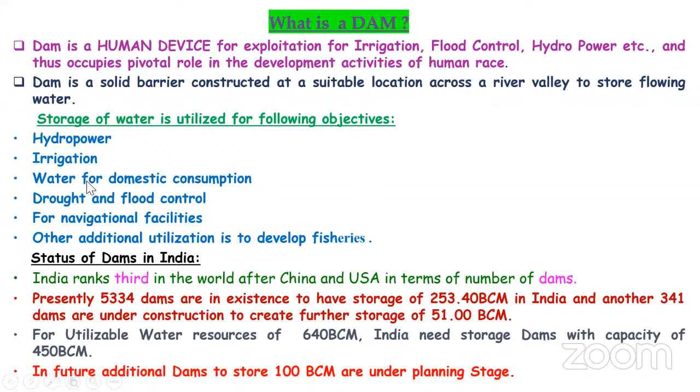A dam is a human device for exploitation of water. It's a multi-purpose structure, useful for flood control, irrigation, hydropower, industries, environment, drinking water supply, and many other activities. Even for environment, whatever greenery is there, the dam is important. A dam is nothing but a barrier across the river, but the barrier should have a surplussing arrangement, otherwise the dam will collapse. So these are the different purposes of the dam.

When we come to the status of dams, India is the 3rd largest country having many dams, compared to China and USA. China is number 1, US is number 2, and India is 3rd in terms of number of dams and storage capacity. Presently we have about 5,334 dams in existence with a storage capacity of 253 billion cubic meters in India. Other dams under construction will create about 51 billion cubic meters more.

But there is a positive scope to have more dams, with a storage capacity of 450 billion cubic meters. That's why some dams are under pipeline. So what I would like to tell you is that dams are so important - they are the backbone of the country and the backbone of agriculture and irrigation.

Dams will not only give irrigation in drought years - we have a drought once every 4 years, and drought can be mitigated by having more storage capacity, the carryover storage. So dams are very important. World across, people say that dams with more storage are required for the future also. Storage is very, very important.

For utilization of this, our utilizable capacity is 640, so we need a storage of 450. You may ask what is the difference between 640 and 450? When 450 billion cubic meters of dam storage is there, we will be drawing and it will get refilled again - just like any minor irrigation tank, we'll have 2-3 fillings. For dams, if not 2-3 fillings, at least 1.5 times filling will be there, so utilization will be 640 billion cubic meters.

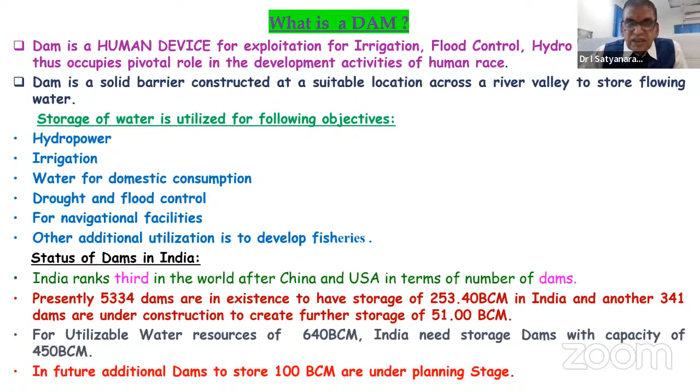In future, additional dams to store about 100 more are on the planning stage. In a graphical representation, I have shown you the number of dams and also the water. In pre-independence, our storage was only 15.6 billion cubic meters.

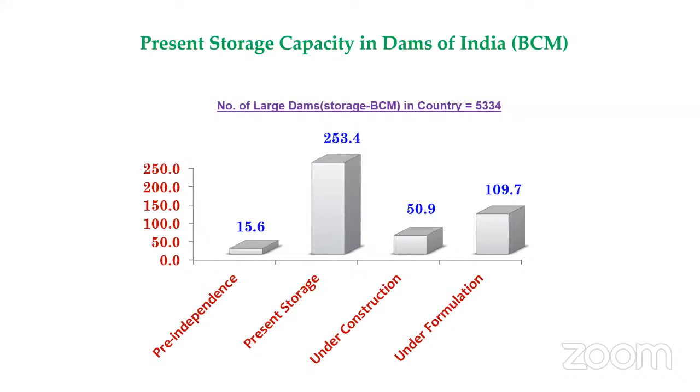We must be very happy that Jawaharlal Nehru started many dams like Bhakra Nangal, Hirakud, Nagarjuna Sagar, Srisailam, and like that. He said dams are the modern temples, and he gave highest regard to the engineers who built them. Because of that spirit we started, and also he was the Prime Minister who started the 5-year plan.

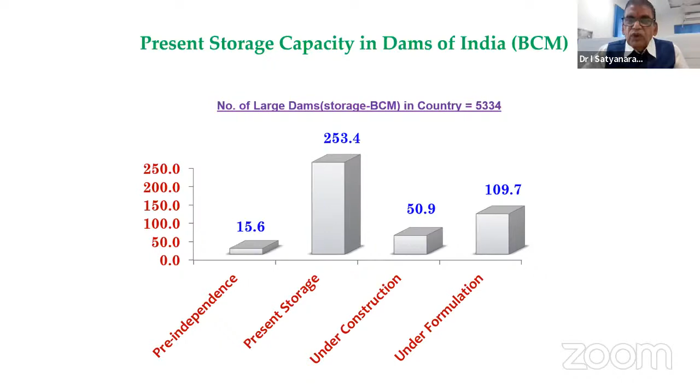So keeping some provision of budget for all these dams, ultimately now we are able to have a storage capacity of 253 billion cubic meters, with a number of 5,334 dams. Construction on dams is giving about 50.9, on formulation stage 109. Ultimately we'll have about 400 billion cubic meters.

Normally a dam is not a single line - you will be having an overflow dam and a non-overflow dam. The overflow dam is nothing but the spillway regulator. When dam safety comes, one needs to know about the components and what vulnerability will be there.

So it is a combination of dams - earth dams. You can see in Nagarjuna Sagar there's a long earth dam, and on either side we have a non-overflow dam, which at times is a masonry dam, with its coping in concrete, and a spillway. The spillway is the heart of any dam.

I told you it is a barrier. Barrier does not mean we will hold the entire water - we should always maintain the status of the earlier river, so some flood must be passed through it. That's why the spillway regulator is there. It must be there. These components must be properly designed and properly executed. Then only will the dam be safe.

Earlier they used to have masonry dams, now it's concrete dams. Concrete and masonry dams are called rigid dams, whereas an earth dam is a flexible dam. You may ask, when concrete dams are safe, why aren't we building concrete dams everywhere? Because engineering is economy - economy is achieved by using locally available material, and soil is locally economically available.

We try to utilize the locally available soil for the earth dam, but where the spillway regulator is, it needs to be a concrete dam. So we use it there, and sometimes the end connections will also be these concrete dams. But in some cases, like hydropower dams, only rigid dams will be there - for example, Srisailam, which is completely rigid, with a spillway regulator, and on either side a non-overflow dam.

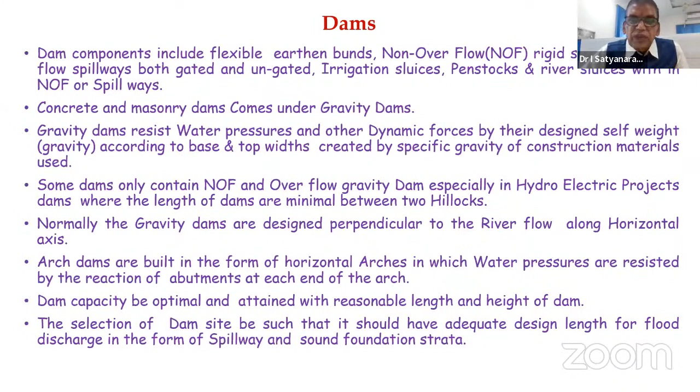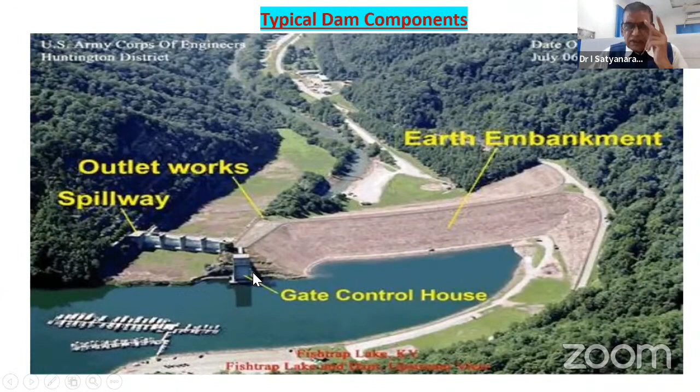This is a beautiful picture that I was able to get. Here an earth dam is shown, and even a spillway regulator is there. The gated control structure is for drinking water supply or irrigation supply. This is the reservoir that you can see.

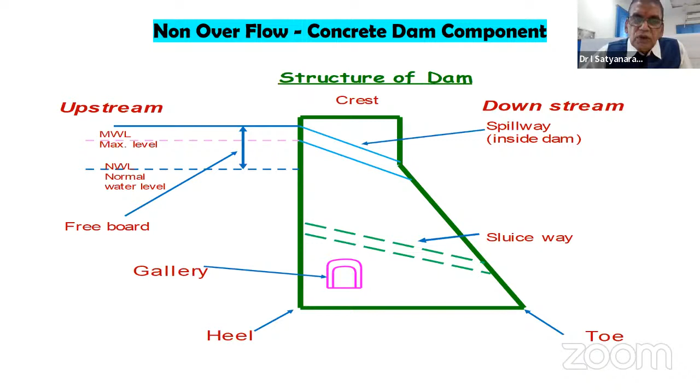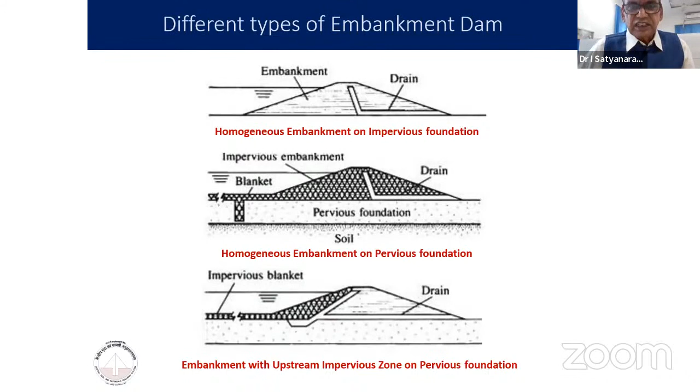So this is about earth dams. There are two types of earth dams: homogeneous earth dams with a filter, central core and so on, and zonal section dams. Homogeneous means only one type of soil is used, other than the filter media. The zonal section has a central core embankment, with different cores and sand filters - this is called a zonal earth dam.

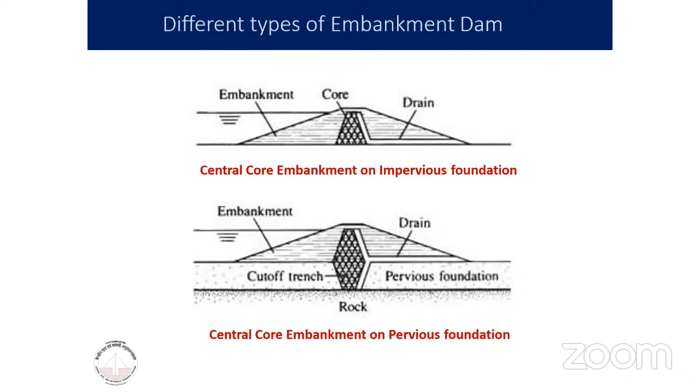Why am I telling you this? Every component of a dam needs to be kept safe. So there is a classification now. In the present code they call them specified dams, but earlier they used to call it a large dam. The definition of a large dam means the dam height is more than 15 meters. But even if the height is less than 15 meters, if the earthwork quantity involved is 0.75 million cubic meters, it was also categorized as a large dam.

Another important thing: even if the dam height is less than 15 meters, irrespective of height, if the storage capacity is 1 million cubic meters, it is also brought under earth dam as a large dam. And even if the maximum flood discharge through the spillway is 2000 cumecs, nearly about 70,000 cusecs, it is also called a large dam. These are the definitions.

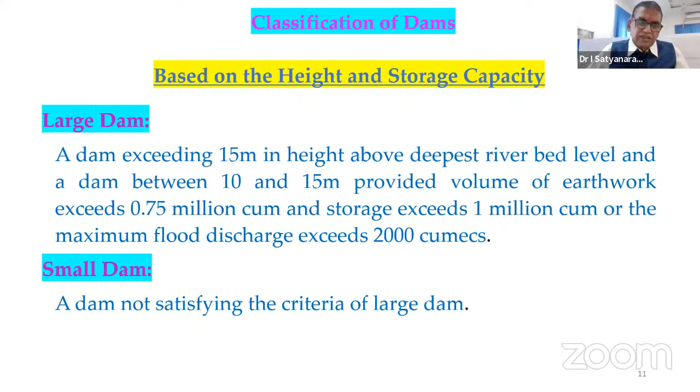But when I discuss the act, that is a separate categorization - the word 'large dam' is now missing, they have removed it. Now it is a specified dam. Anything inferior to, less than, these parameters is called a small dam. This is for design purposes.

We have three categories: small dam, intermediate dam, and large dam. This calculation depends on the design flood. Normally any dam will be designed for a 100-year flood, 1,000-year flood, or 10,000-year flood. All small irrigation dams will be designed for about a 25-year flood. Any gravity dam or earth dam other than medium irrigation projects will go for 100 years. For intermediate dams, where storage capacity and hydraulic head matter, that is 12 to 30 meters, the standard flood will apply.

All large dams need to be designed for probable maximum flood (PMF). PMF means the scenario when all the inflows and rainfall come together - it's a theoretical concept, like a flood that occurs once in 10,000 years. PMF is the flood expected from the most severe combination of critical meteorological and hydrological conditions reasonably possible in a particular drainage area.

Designing a dam for probable maximum flood is very costly. Some designers argue it won't come once in 10,000 years, so why should they invest in a longer spillway?

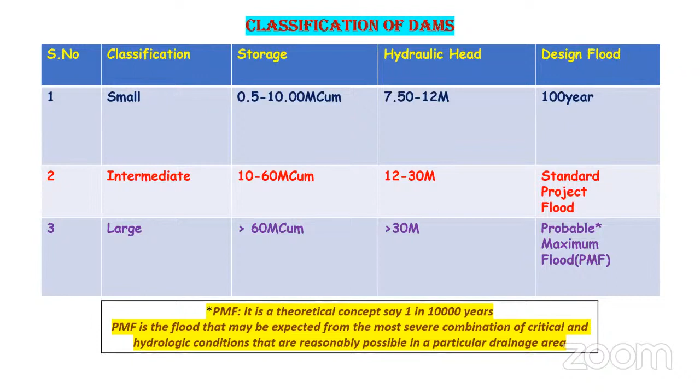But what was proved is in 2009 at Srisailam, which was designed for a standard flood. The probable maximum flood was estimated at about 26 lakh cusecs, but nearly 23 lakh cusecs actually came. So there are danger belts - any dam may experience that probable maximum flood.

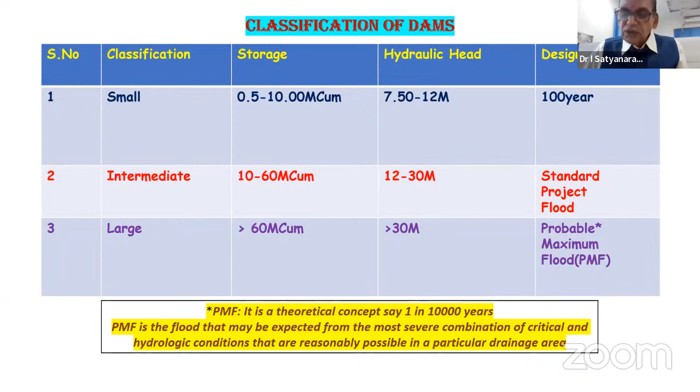That's why all existing dams must be checked for probable maximum flood and dam safety - whether the dam is safe with adequate vent-way and spillway length.

These are the number of dams across the world - nearly about 59,000 large dams are there. Earth dams are about 38,000, and rock-filled dams are also common. Rock-filled dams mean the hearting is only soil, and rock forms the outer cover.

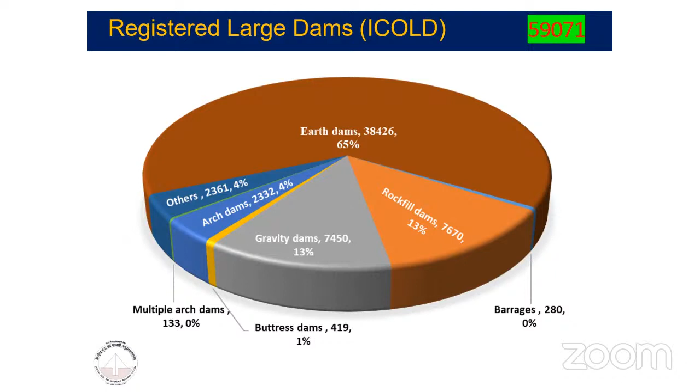Why rock-filled dams? When you excavate the foundation, a lot of muck is generated. Engineering is nothing but economy, achieved using locally available material. Instead of wasting that rock muck, you utilize it to cover the hearting - like at Polavaram, which is also a rock-filled dam. This is economical and the structure will withstand well - it's essentially waste management or recycling of available materials.

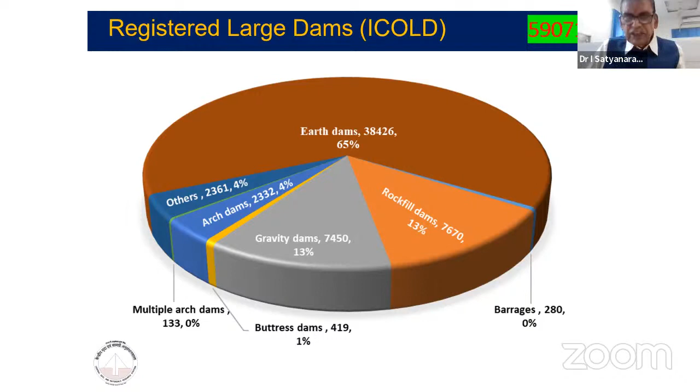Gravity dams number about 7,450, purely gravity dams. There are also combination dams, with gravity dam and earth dam together. This is for large dams, more than 15 meters.

Now for the Indian scenario: completed dams number 5,033 or 5,334. A PDF version of this PPT will be kept on YouTube, and I'll also arrange it through the Institute of Engineers so anybody can access it.

Coming to large dams - large dams means more than 1 million cubic meter storage, so irrigation dams also come under this category. Under construction, there are about 411 large dams, making the total number of large dams 5,745.

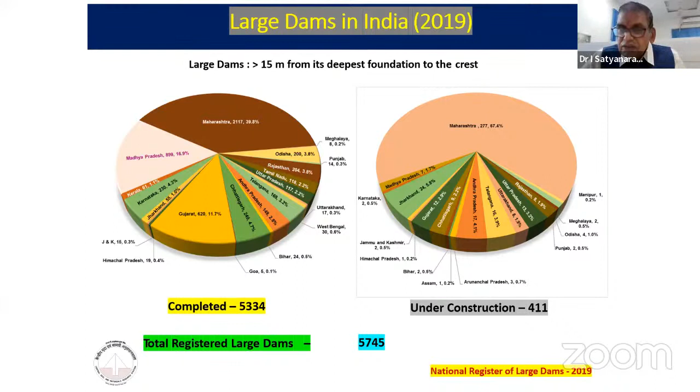On the other slide I mentioned the number of dams - medium and major dams total 5,334. This is according to a register of large dams from 2019. Now, instead of 'large dam,' they are calling it a 'specified dam.'

Year-wise, the large dams with their deepest foundations to the crest are tracked, since dams are progressing every year - some are completing, and there's statistics taken on this.

So what is dam safety? It's a techno-management discipline - asset management and public safety assurance on the part of the government. Techno-management means a dam has to be kept safe, otherwise it's giving a lot of benefits that could be lost.

If a dam breaks, the entire thing will collapse - storage will not be there, drinking water will be a problem, irrigation will be a problem. Even the cost of the dam, the asset management and capital cost invested, is lost, and it has to be rebuilt with additional cost.

Safety is important - when a dam breaks and collapses, on the downstream side a lot of villages and large areas get submerged. There will be loss of life, loss of property, and loss of crops. So we have to keep all these things in view - dam safety ensures dams will not break, losses will not occur, and the structure remains safe and functional.

Just like human beings want to live for more years, dams also live to the extent of their design. Generally, failures will occur - hydraulic failure will be there, including overtopping, erosion upstream and downstream side, and toe erosion.

Seepage failure - for earth dams, when the failure starts with seepage, ultimately it becomes piping, and the dam will collapse. Structural failure will be there on the downstream side. The toe will get erosion, both upstream and downstream side. Sliding will also happen - dams also get slides.

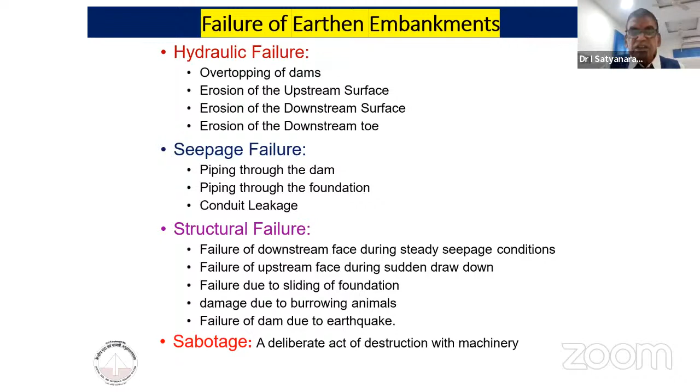Other defects that lead to dam safety issues are overtopping, wave erosion, toe erosion, gully formation, and internal seepage. Instability of foundation is also a concern - sometimes foundations create problems during construction, and we conduct investigations with boreholes since only samples are available.

But sometimes between boreholes, faults will be there, which creates problems that surface even after construction. Sometimes the dam will deform, and settlement is another important issue, especially for earth dams.

The major cause of dam failures is foundation failure, overtopping, and inadequate spillway. About 50% of dams collapse because of inadequate spillway - the spillway is designed for a certain flood, but the occurrence of flood is much more than that.

We are very grateful that our engineers built great dams. KL Rao and other engineers of those generations were very dedicated - they built Srisailam and Nagarjuna Sagar. That's why even though the design flood was exceeded in 2009, the dam was quite safe.

But not all dams will be like that. For example, the same discharge went to Nagarjuna Sagar, which has earth dams on either side. The earth dam could have been breached at that time, but we were able to manage it.

I proudly say that I was one of the management team during 2009, as a special officer deployed to Srisailam, Nagarjuna Sagar, and also Prakasam barrage. There was a lot of risk management involved there as well.

Uneven settlement and earthquakes are other important things. Fortunately, both AP and Telangana are not in a severe earthquake zone, but some earthquakes will come, and there's no guarantee a severe earthquake won't occur in future. That's why you have to design the dam against earthquakes also.

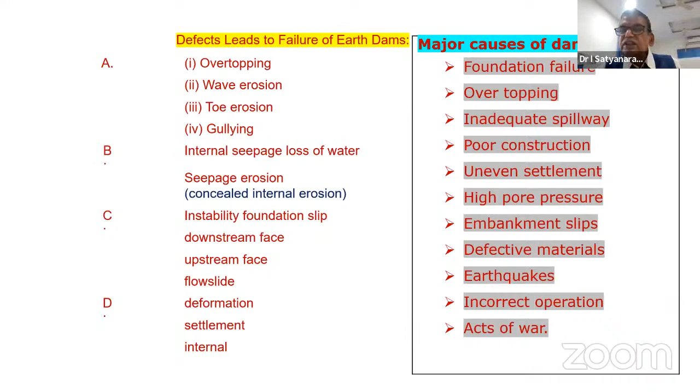Operation is also very important. Some people operating the gates think the reservoir will fill up again if they release water, wondering whether inflows will refill it. If you take the risk of non-operation, the dam will overtop and collapse. Most dam failures - about 50% - happen because spillway lengths are insufficient.

At the time of dam design, we design according to the historical hydrology available. Srisailam was also designed for about 15 lakh cusecs at maximum water level, but it received 23 lakh cusecs because subsequently severe events occurred. Now, for any future dam construction, we will take 2009 as a benchmark.

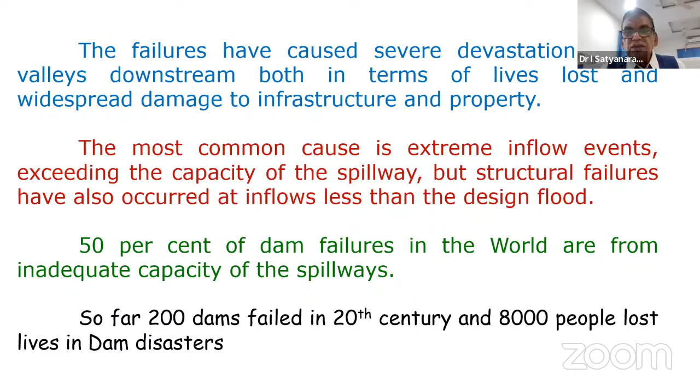200 dams across the world failed in the 20th century, and 8,000 people lost their lives. People think a newly built dam won't fail, but the situation is different - some dams failed even during execution. I'll tell you one or two examples.

About 44% of dams, according to a statistic of 36 dams, fail within 5 years. Normally we think a dam will fail after 40 or 50 years, but there's no guarantee a dam will be safe till then - sometimes dams fail sooner. In 50 to 100 years, normally we'd expect about 16.67% to fail. More than 100 years, only 2 dams failed. Of course, when a dam reaches that age, we'll go in for a new dam on the upstream side.

That is what happened in Dowleswaram Anicut and Krishna Anicut, and also Nizam Sagar. So we have taken precautions for the retrofitting and rehabilitation of the dams. So some dams failed in these cases.

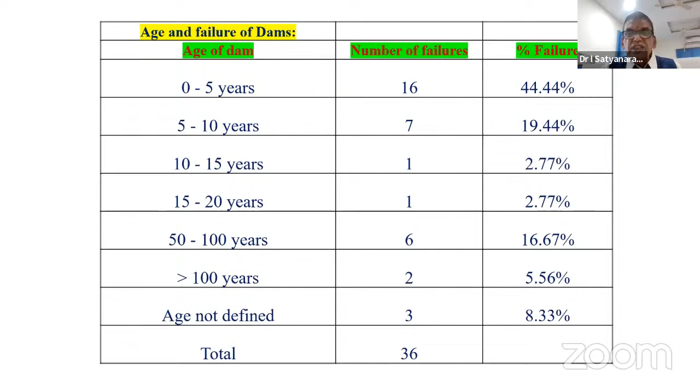Failure of dams, I think one cause is age, and this is about different technical problems. Mostly 40% of dams failed because of foundation problems. Next comes the inadequate spillway - spillway length is not sufficient, and number of vents are not there.

In spillway gates also, I think 10% we take as inoperative. That means during flood time, because of the hydraulic head, some of the gates cannot be operated. So when hydrology comes, we design for a number of dam gates, say 20, we will add 2 more, normally that safeguard we take. Even that, sometimes the capacity is not sufficient, then dams will overtop and fail.

So poor construction - I think because all senior engineers cannot be there, it will depend on some work inspectors or one or two lower level engineers. Some work is happening 24/7, so supervision also, of course some designs will take care of these flaws in supervision and quality control, but all these things will be there.

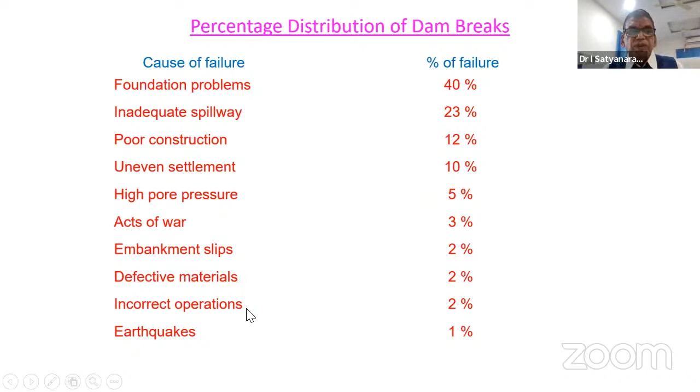Act of wars - I think other countries, enemy countries, they blasted the dams, that is about 3%. Defective material also we must be very careful about - cement, and sometimes steel also, some problem with local rolled steel and other things. Operation - incorrect operation, and earthquakes only 1%, but now all dams are checked for earthquakes.

So these are the failure causes - same thing, defective spillway, defective outlet. Please go through that, because in an endowment lecture we cannot go on like a seminar for about 1 to 1.5 hours, normally it's 30 to 40 minutes. So I am keeping this PDF on the website and also making it available to the Telangana State Center.

So concrete failures also - what are the concrete dam defects? Uplift pressure will sometimes cause dam failures. Over stress will be there. Tension also sometimes causes failure of concrete dams. So the center of gravity, middle third rule, you can go through that.

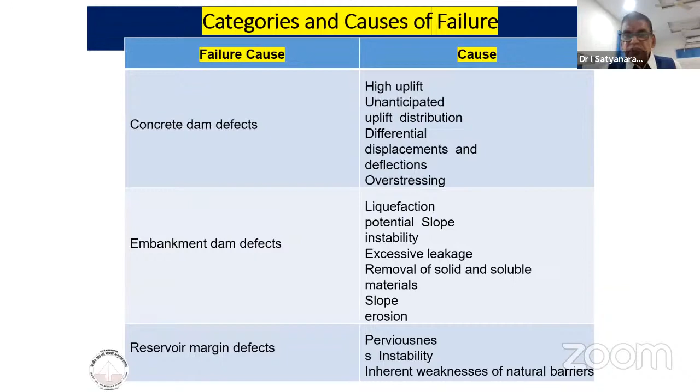Embankment defects already include liquefaction - if foundations are sandy, settlement will occur. Liquefaction is an important factor for designing earth dams. Reservoir margin defects - there is instability and weakness of natural barriers also. Flashy floods also are another cause for this.

So these are some of the list of dams. In India, about 36 dams failed. We got this statistics and information on different things. Even our Kadam Dam also failed - we had this in the combined state, now in Telangana state also, because that was due to flashy flood.

In a short time the water came and overtopping happened. So mostly it's breaching, piping - it's all about this. In Tamil Nadu, Kodaganar, Machu Dam - I think I will show you 5, 7, 8 cases of dam failures so you can study these.

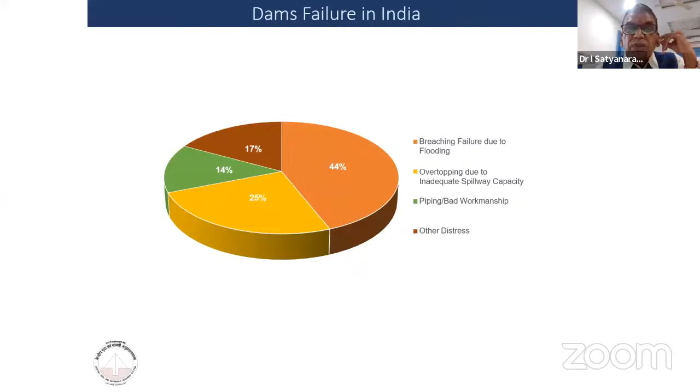So these dam breach failures are 44% of dams failed by breach failure. Overtopping is about 25%, and piping and bad workmanship is 14%, and other distress is 17%. So these are different years of dam failures in different years, we can say.

So now we come to this - 200 dams failed in the 20th century and 8,000 people lost lives. I have already read this statement. Some of the important dams that failed are Vaiont Dam in Italy, South Fork Johnstown Dam in USA, Teton Dam in USA, Tailings Dam in Italy, Malpasset Dam in France, and Kantle in Sri Lanka. These are some of the cases.

In India, Machu Dam in Gujarat failed in the 1970s. Kadam Dam, as I told you, because of flood the earth dam was breached and the spillway was not sufficient, so a new spillway was also added. Panshet Dam, near Pune, was also failed.

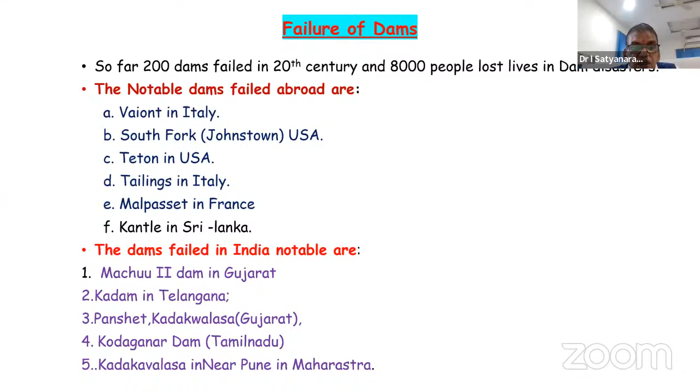Kodaganar Dam is in Tamil Nadu, and Panshet is in Gujarat, near Kadakwalasa. So Machu Dam is one case - this was built in '72 on the Machu River in Gujarat. In '79, a flood actually - the design flood for the spillway was 6,180, but 14,000 cubics was achieved.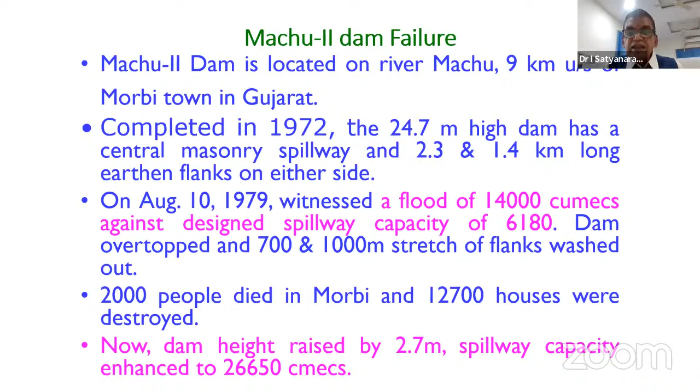Next is Kaddam. Actually, Kaddam is a part of this SRSP. This is Koyna Dam, which is a hydropower dam, in an earthquake zone. Initially, whatever history was available at the time of dam construction, they took into account, but subsequently the severity of earthquakes was higher. During construction, through the years, earthquakes occurred and some cracks developed. They rectified it at Koyna Dam, and ultimately now it is safe. But only recently a seminar, a national convention, has happened on it. So Koyna Dam, actually all hydropower dams, have tailraces that go through the river.

But the particular thing about Koyna Dam is that all its tailrace water goes into the Arabian Sea. Now Krishna is a deficit river. Had that tailrace water gone into the Krishna river, some water problems for Telangana, Karnataka, and AP could have been solved. Actually, there is a logic also: one chief minister at that time said that in June and July, please don't produce hydropower, please leave the water to the downstream side, and we will pay whatever cost of the power you are generating. But these are all interstate issues.

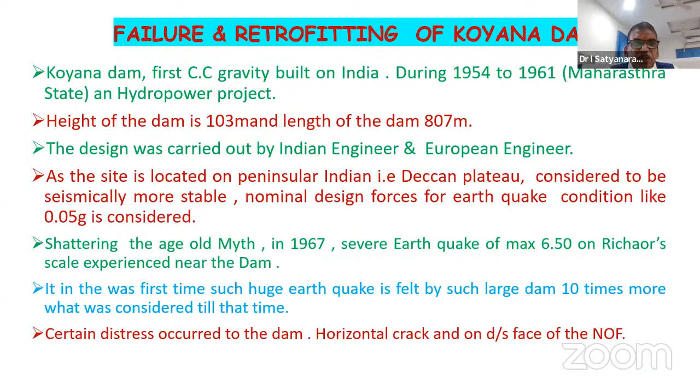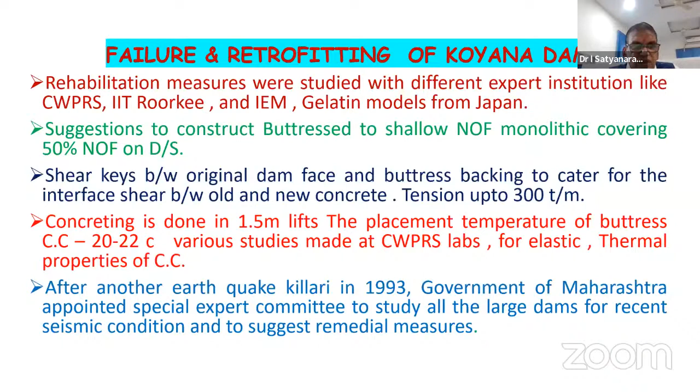So a lot of studies have been taken up, and now they have taken all remedial measures for Koyna Dam. This is, I think, one of the very good hydropower dams. But the only thing is that after generation of power, what is going to the sea is wasted. So this is another dam in this one.

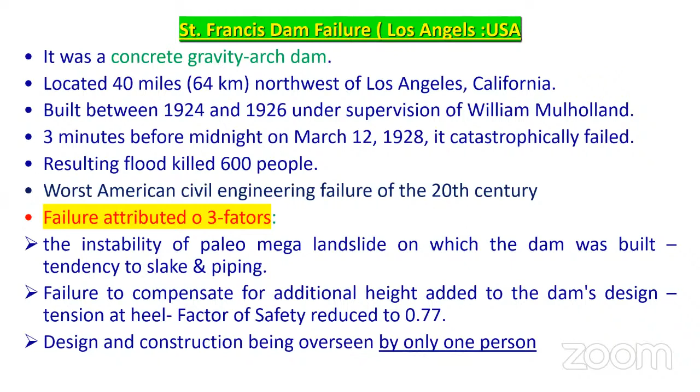Another thing is construction and actual supervision failure was also attributed to this. So this is the Malpasset Dam in southern France. This is an Arch Dam, actually, that is one of the things noted here.

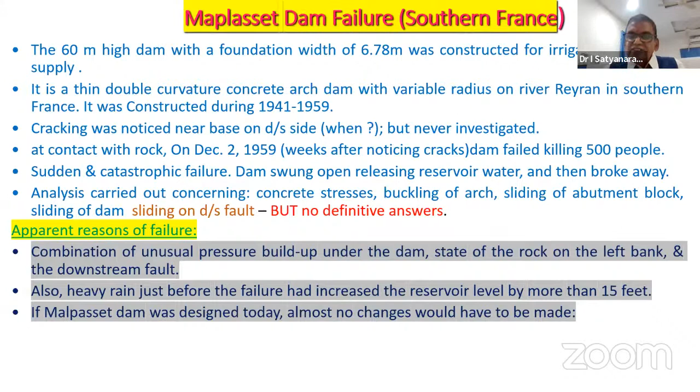So heavy flash floods. Actually, this is the Malpasset Dam today. At that time, the design criteria were different. I think now in Nagarjuna Sagar and Srisailam, the design criteria available from BIS codes or ISI codes were from the 60s and 70s. Now a lot of changes have come. So we have to check these dams against present criteria, and that means we have to do retrofitting or rehabilitation of the dams.

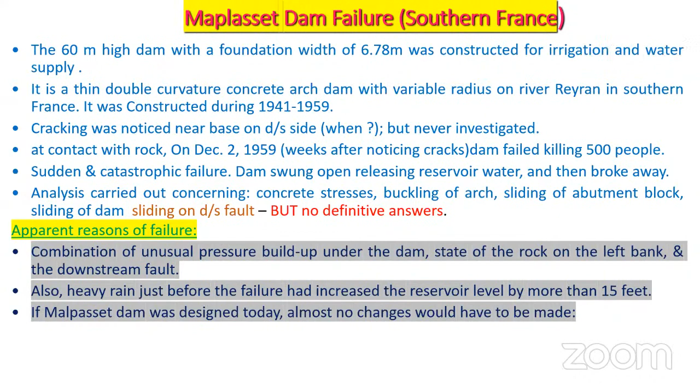So Kaddam Dam failure was actually because of a flashy flood. I think the catchment is very flashy, with a short catchment area but in a short length. So that is there. I think here also an additional spillway was constructed.

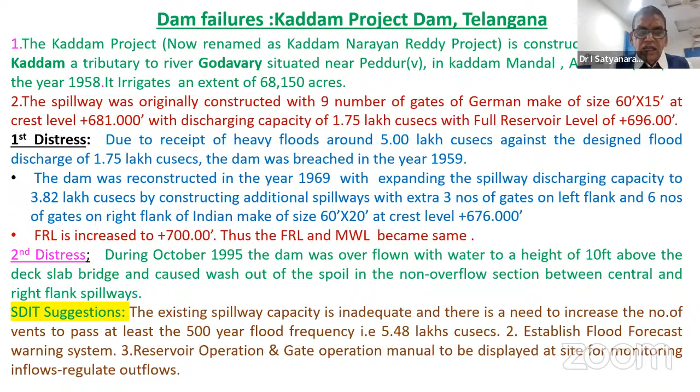I think GL Rao's team was also involved during this failure. It failed twice, because of overtopping, and additional spillway capacity was added and increased. Ultimately, the State Dam Safety Inspection Team, with experts, found the existing spillway inadequate. There is a need to increase the number of vents to pass at least a 500-year flood frequency, and to establish flood forecasting and a reservoir operation manual, which is very, very important, as they suggested.

So this is actually the Kaddam Dam. Originally, when the spillway was there, additional spillways were added to it.

So this is Gundlavagu, my irrigation tank. Dam failure means it need not be breached. Actually, they built a dam, but the storage is not there. The dam used to be empty, once it is stored in 2-3 days. So again, with grouting and other things also, we got it done.

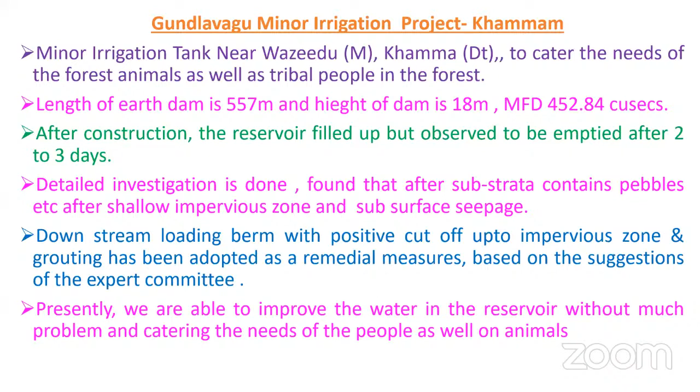Dam safety means actually water breaching, growing, it is going through underground also. In the downstream side also, a lot of habitations will be affected. Water table will be higher and structures will collapse.

So this is the one, even during the construction time, the Palem Vagu in Khammam district at that time, now it is Mulugu district. During construction time, twice it failed. Of course, it is a medium project, but the height of the dam is nearly about 35-45 meters, 40 meters highest. Normally in a dam it will not be there.

Here also the flashy flood is there. Actually, the spillway was designed, and because it's an interior remote location, there were some extremist problems. An ungated spillway was kept in plan, but they found some foundation failure, and the rock is not solid rock - it is layered rock. So it was breached twice. Ultimately, we provided another gated spillway.

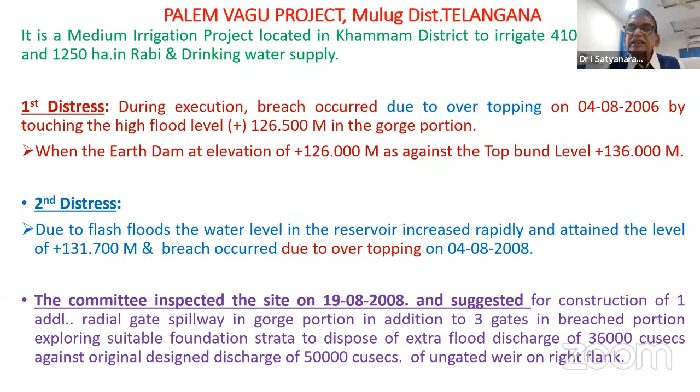So this is also one of the cases. Recently, as an NABARD consultant, I have visited - now the dam is quite all right. So this is actually an earth dam that was breached because of overtopping and all those things.

So now we are coming to the background of dam safety. What is the background? Why did the Dam Safety Act come into force? In 2002, a draft Dam Safety Act was prepared by the Government of India. It is actually a Government of India act, so they circulated it to all the states to pass the act through the state legislature.

In the Indian Constitution, some subjects are of concern to both state and central governments. So at least 2-3 states must pass that act as a central act, then the Government of India will pass that act, and ultimately it will come into force. So when I was the chief engineer, we got this act passed in 2009.

West Bengal also passed it, but subsequently, after 2-3 states had passed it, they introduced the bill in the 15th Lok Sabha on 30th August 2010. But at that time, the bill was referred to the Parliamentary Standing Committee for observation, so it took a lot of time. Ultimately, the Parliamentary Committee gave some observations.

Those observations were included in the act - bill and act. Ultimately, it was passed by the Parliament on 14th December 2021, and it has come into force. This act is called the Dam Safety Act 2021.

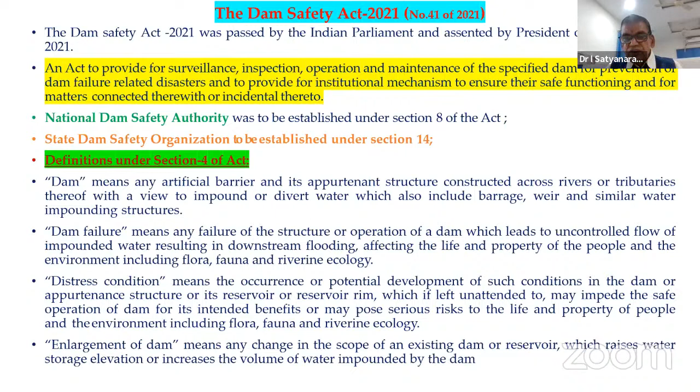Again, we have investigation, design, hydrology, and everything must be going in place. This is normally how for any act, definitions will be there. So tomorrow the act, we must deal with that. This one else, the definition must fit in, not our own definitions.

Operation of a dam: during flood season we'll operate the gates, and also the filling of the reservoir, emptying of the reservoir. So even when a new dam comes, you cannot fill it to full storage. Recently, Kaleshwaram, the Mallanna Sagar, also now it is only against 50 TMC, now it is only 10.5 TMC. Gradually in 3 years, ultimately that will be achieved.

Why is that? Dams are prone to issues if filling happens suddenly, so we have to observe the performance of the dam, whether seepages or monitoring must be there. It's always the case, even when filling of a new dam, or existing dams, to what height, we have to do that observation. Not FRL, it should not be brought to FRL at a time. So in a passage of 3-4 days, it must be done.

O&M manual, that is very, very important, and operation schedule of this one also there.

Previously we used to call it a large dam. Now they have made it a specified dam. That means the Dam Safety Act, National Dam Safety Authority, State Dam Safety Organization will specify certain dams that are vulnerable and need to be under a surveillance list. And remedial, what exactly remedial measure also the definition is given. In specified dams, now previously I gave one definition about large dam. Now presently the definition of this is almost the same.

They are not calling it a large dam, but the specified dam means the crest length should be more than 500 meters. It comes under a specified dam. Capacity of the dam should be more than 1 million cubic meters. Maximum flood discharge should be about 2,000 cumecs. That is also only their definitions; they have brought in some more definitions.

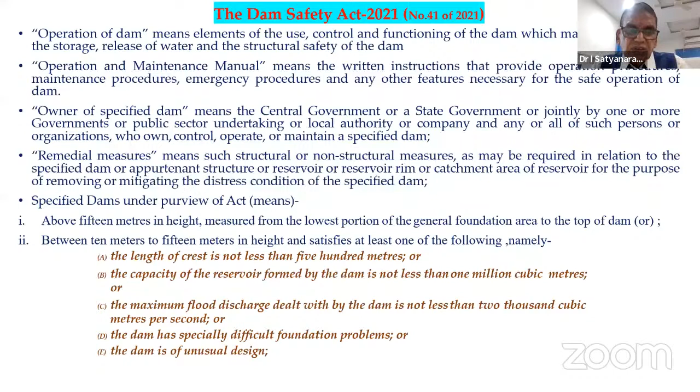So there are different sections. I'll cover the important sections only, because of time constraints, for another 10-15 minutes.

Section 8 deals with the establishment of the National Dam Safety Authority. It must be headed by someone not below the rank of Additional Secretary to Government of India. It will have members with required qualifications, and whoever heads this committee must be technically knowledgeable.

Section 9 deals with the duties of the National Dam Safety Authority - what are the duties and responsibilities. It guides the state dam safety organizations and watches the vulnerable dams list. All information the state dam safety council gathers must be arranged to the National Dam Safety Committee. There will be a Dam Safety Committee, a Dam Safety Organization, and an Authority - both exist. The Committee is staffed by senior personnel, while the Organization works on it full time continuously. Section 10 deals with staff pattern and responsibility rules.

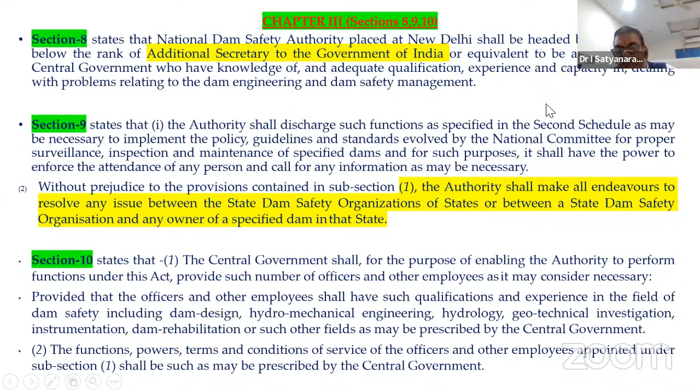Section 11 deals with who has to head that organization - the criteria, qualifications, and expertise required - and also who has to head the state dam safety organization. One chief engineer must head it. Previously, when I was the chief engineer, state dams were sometimes headed by a superintendent engineer because of my academic interest and passion for the subject - I used to support the SDSO, a superintendent engineer reporting to me. Now it is specified that chief engineer rank must head it.

In respect to hydroelectric dams, the Central Electricity Authority is there, headed by one director, nominated by the central chairman of the Central Electricity Authority. This is about who has to head these bodies.

Section 13 covers the meetings, which is very, very important. The state committee meeting must be conducted at least 2 times minimum. When I was chief engineer, I used to strictly follow that, and I appreciated it. During meetings, issues come up, and sometimes decisions from government are required - whatever issues crop up, we write to government requesting budget or expertise needed. Normally there are 2 meetings: one before the monsoon season, to discuss the status of dams and take urgent actions, and one post-monsoon.

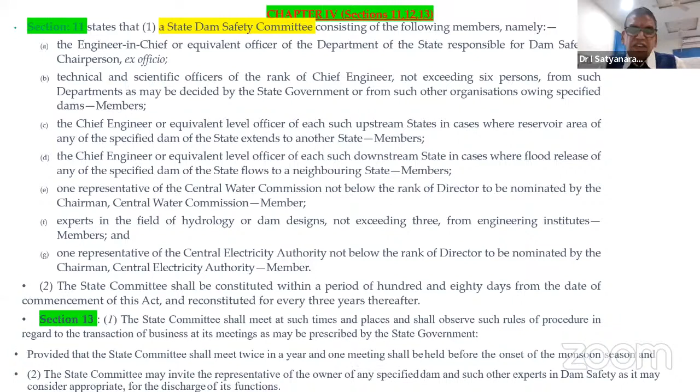Section 14 is about the duties and responsibilities of the state dam safety organization. Every state dam safety organization, through officers, owners, or controlling officers, must coordinate, keep perpetual surveillance, and carry out inspections. Inspections will be organized by the state dam organization, and inspection reports cover actions to be taken, including operation and maintenance.

Section 17 deals with the classification of dams according to vulnerability. Every year more dams get added, so we have to review that. The specified dams will still be maintained by the SDSO, who will also alert the people. Section 19 deals with dam failure.

If any dam failure occurs, the SDSO must prepare a report, immediately get rectifications done, and also report to the Central Dam Safety Committee. This is the responsibility of the State Dam Safety Committee. I told you that Palem Vagu dam failed, and at that time the SDSO submitted a report not only to the state government but also to the central government and the Central Water Commission. So this duty exists: any vulnerability or failure must be reported.

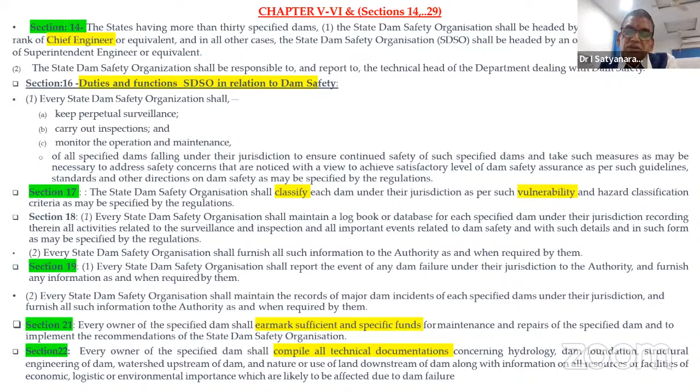Section 22 talks about compiling technical documentation of hydrology, dam foundation, structural engineering, and watershed upstream side, and other important things. Documentation is very important. History of the dam is very important, because the dam was constructed 50 years back and today somebody else is managing it. So unless history can speak about what precautions were taken during construction, what geological steps and remedial measures were taken, we cannot watch for that vulnerability.

Section 24 speaks about the owner's responsibility. The dam owner's definition is also given. Not every dam is under state or central government control. Sometimes the Central Electricity Authority has hydropower dams. Some undertakings have their own dams, and some industries also build dams with the concurrence of the state and other authorities. So all dam owners' responsibility is covered under section 24.

Now why am I telling you this? This act fixes responsibilities; punishments are there, and responsibilities are there too. If some dam fails, the owners or custodians of the dam will be responsible. Prior to this act, normally the department used to take that responsibility and try to cover the officers. But now, after this act, one cannot take shelter by saying 'I wrote to the government, they did not give me budget, they did not do this or that.' That may help in a long run to fight the case, but immediately when a dam fails, they will pull up the concerned officer who owns and controls the dam. That's why every engineer working in the water resource department, I&CAD, must be conversant with all the provisions of dam safety, because tomorrow one has to safeguard themselves.

The important thing is we have to keep all dams safe, since that is in the public interest. So more responsibility lies with the officers.

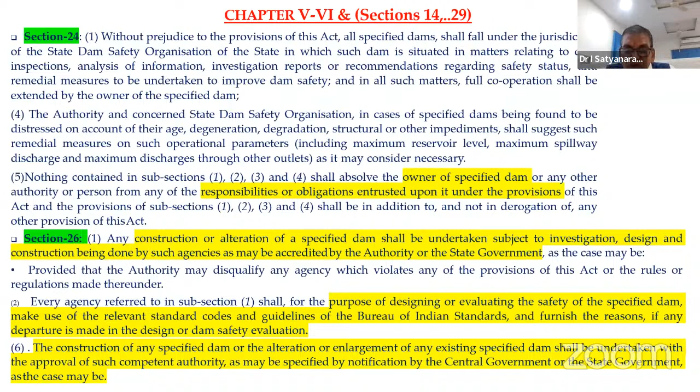Section 27 is about reservoir filling. Initially we have to fill the reservoir to a certain height only, and that filling is observed every 50 centimeters or 1 meter, with adequate monitoring and CPS observations. Before initial filling, the dam must be inspected by dam safety experts, which the State Dam Safety Organization has to organize. This is very important.

Section 28 deals with obligations and liabilities of the dam owner. If the owner is not obliging the directions given, even if the dam owner is a public undertaking or some other corporation, the dam safety organization, run by the irrigation department, gives instructions. If that owner does not heed the instructions and rectifications are not done, then he will be liable. Section 29 also deals with obligations of the dam owner, liabilities, and related matters.

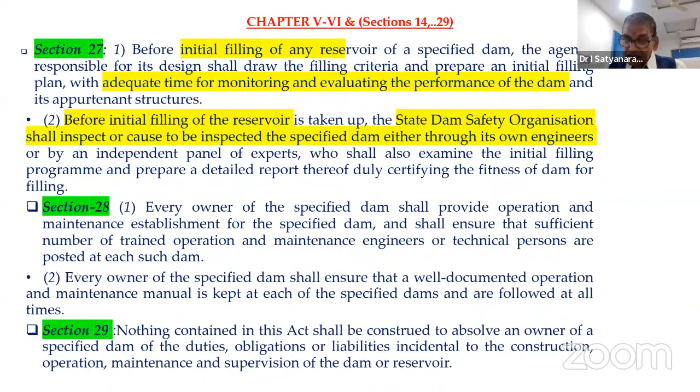That is important, and officers should not be afraid of this. I think they must be conversant with all the provisions, sections and chapters. We have about 11 chapters, and this act contains about 56 sections. Every engineer needs to be thorough with this.

Section 31 deals with pre-monsoon and post-monsoon inspection. That is very, very important. Every custodian of the dam - for minor irrigation, EE has to do it; for medium irrigation, SE has to do it; for major projects, the chief engineer has to do it.

Post-monsoon inspection, pre-monsoon - post-monsoon means taking all steps when the flood comes. During flood time also some damages will occur, so that needs to be observed and we need to rectify all the things. Technical persons will be required, especially during emergency.

The officers must be at the dam site. Of course, I don't want to name, but in Kadam Dam also, when it happened, the chief engineer was not available at site. The government finally took action on the chief engineer for not being there at the dam site.

Just telling how the previous past history also shows this. And instrumentation is very important.

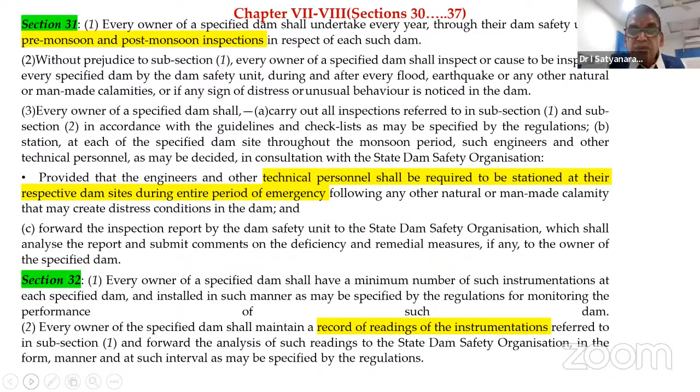Section 33 deals with establishment of meteorological stations, and some dams are in the seismic zone, so we have to establish seismological stations as well. Every specified dam collects, compiles, processes and stores data - collection of data, maintenance, and sharing with state dam safety is important.

Chapter 8 deals with emergency action plan. What exactly is an emergency action plan? It means if a dam fails, what villages will be affected, and whether any forecasting system or warning system is available - the probable flood-affected areas will be identified there.

So if an emergency comes, which villages need to be evacuated - the evacuation plan is also part of this. At that time we keep all the history of the dam, and experts must be there to guide. During the 2009 flood in Srisailam, many officers rushed, myself and the mechanical gates team.

Kanno Naidu and I went in the early morning. Lapu Shetty Garu was asked to go by 3 o'clock in the morning. We went there - people were stating to open one of the gates, as they thought the left flank would get eroded. Even though the chief engineer was not taking a decision, I myself stepped into the shoes.

I gave instructions to open that gate. Ultimately, the principal secretary, Adityanath Das, appreciated that the team had taken a wise decision - otherwise there would have been some problem to the dam too. Like that, we should not shed our responsibility; ultimately we have to protect it.

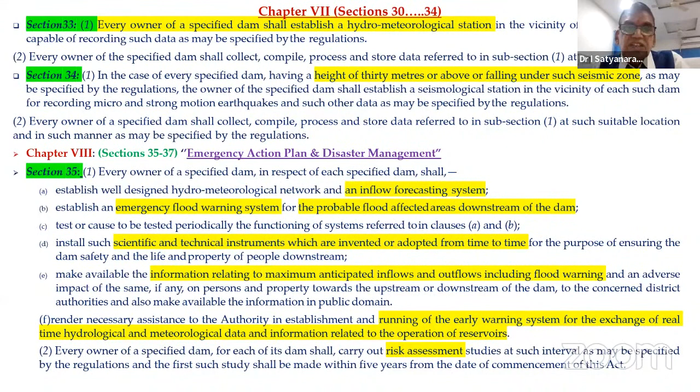So the emergency action plan is all important, and it is not a one-time thing - it needs to be updated once every 3 years. Section 36 also deals with this emergency action plan.

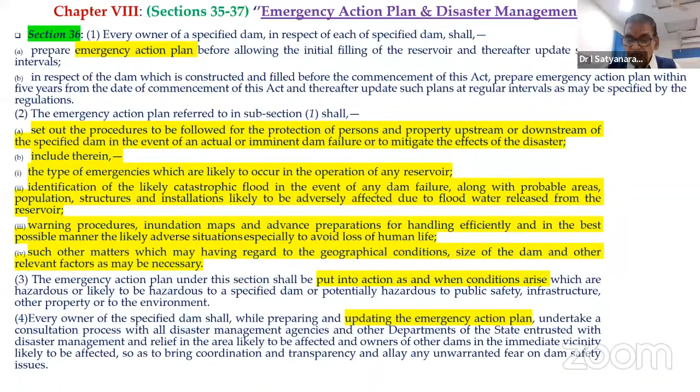What are the requirements of an emergency action plan? That includes the types of emergencies - cyclones, floods, earthquakes, and all those things will be there in the emergency plan. Even threats from external forces, in wartime they try to put some bombs there and release bombs from aircraft - all of that must be considered. This emergency plan is the very heart of disaster management.

Section 38 is about comprehensive dam safety evaluation. I told you that due to aging of dams, we have to evaluate the safety. Comprehensive dam safety is not a routine thing of hydrology checking or design checking - in all consideration, we have to deploy a team, and if necessary, hire a consultant. A comprehensive safety action plan must be prepared, and shall be compulsory in case of major modifications or discovery of unusual conditions.

Of course, the dam was not designed for the earthquake. Now if an earthquake recently occurred, we have to redo the hydrology and seismic evaluations based on that. This is a continuous process. Section 39 deals with this also - major modifications to the original structure or design criteria require a comprehensive dam safety evaluation, considering unusual conditions and extreme hydrological or seismic events.

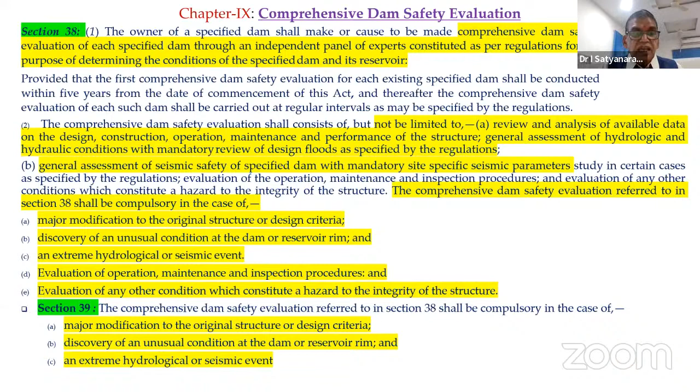Section 40 deals with reporting to SDSO. Every dam owner must provide pre-monsoon, post-monsoon, emergency action plan, and health status of the dam to the State Dam Safety Organisation. In turn, the State Dam Safety Organisation will report to the National Dam Safety Expert Committee, which will review it. We cannot be complacent just by reporting - they must follow it up and if there is any budgetary requirement, they must get it written to the state government and include it in the budget.

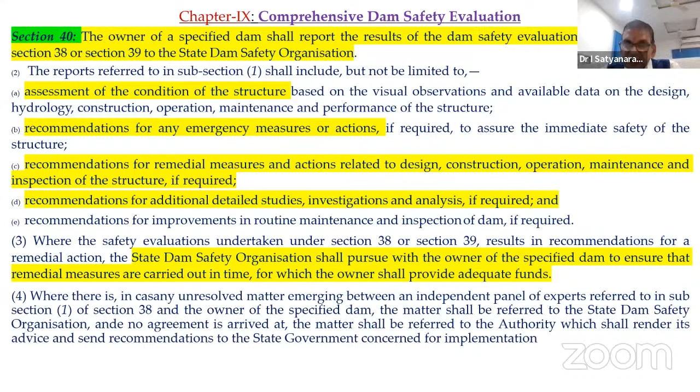Now the Dam Safety Act says separate budgets must be there for dam safety. That means in irrigation, apart from construction of dams, a sub-head must also be there specifically for dam safety. Sections 41 and 42 deal with this.

Sections on offense and penalties are very, very important. Not to scare you, but there is a clause here that officers must take care of. One shall be punishable with imprisonment of a term extended to one year, or with fine, or with both, if there is obstruction or refusal to comply with instructions given.

For example, in Chennai, I think Chembarambakkam is also there - in one of the dams in the heart of the city, they did not open the gates because they were awaiting instructions from somebody else. So it actually flooded - suddenly they released the flood and it caused flooding. So not following instructions is also a serious matter.

That is important, and also sometimes there is manual human failure. In one of the cases, the officer was not at the dam site, and a tragedy occurred. So definitely the officer will be held responsible as per the Act provisions, and even courts cannot interfere, unless it is against some fundamental duty or overridden by some other act. So why I'm telling you this is not to scare you, but to make you careful - there is an act where every officer who is owning or is custodian of a dam is responsible.

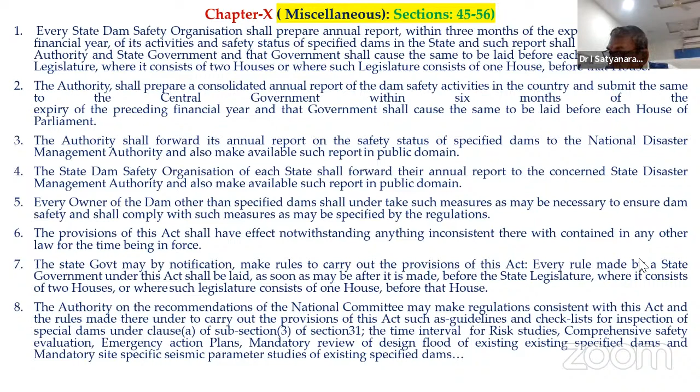About the duties, the last thing is that two schedules are there. Schedule 1 is about the National Committee on Dam Safety, their duties and responsibilities. The other important thing is the National Dam Safety Authority and also the State Dam Safety Committee - their schedules are also given.

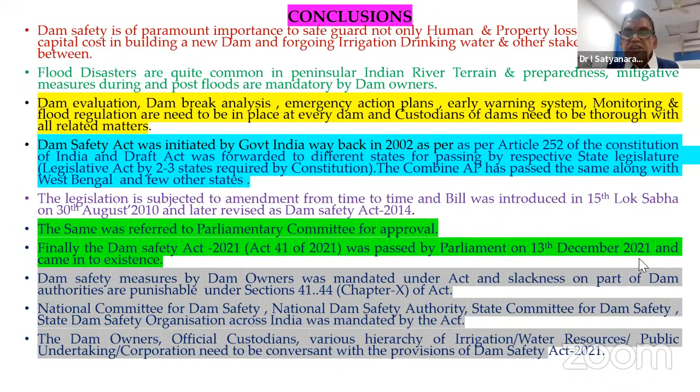When a disaster comes, everybody rushes to the site - chief engineer has to go, SE has to go, EE has to go, all that. Now this act says we have to be placed at what place, and what actions we have to take in advance also. So these are the provisions of this act.